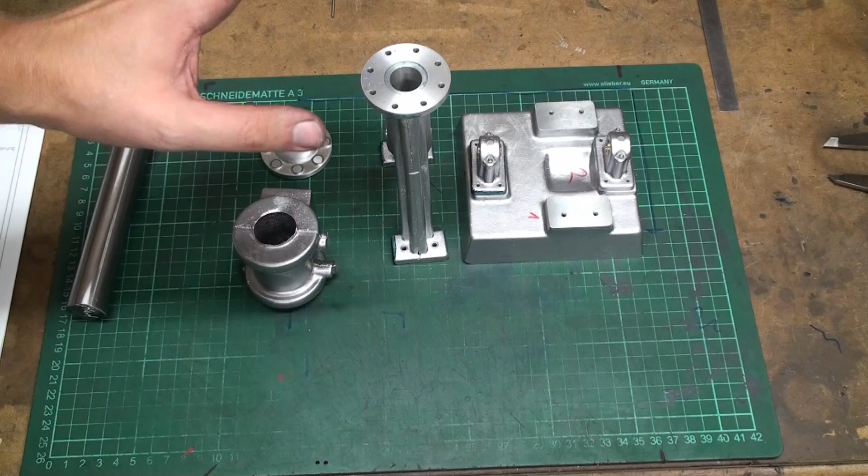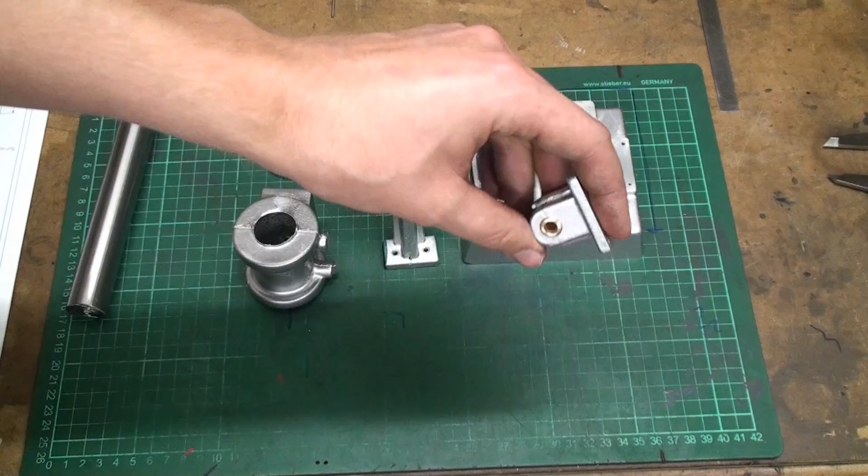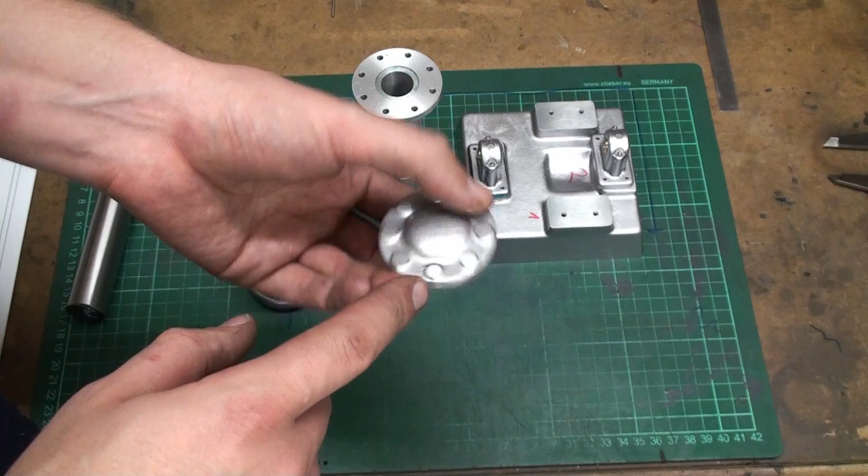This is part 3 on the small single-cylinder steam engine. In past episodes we machined the base, the A-frame, and the bearing blocks. I made off-camera the brass bushings that go in these bearing blocks because there wasn't much interesting about them. They were just turned from cast bronze rod material and made to fit the bearing blocks. I also started to machine the cylinder head, which was also just turning. So far it's only turning. I still need to drill the 8-hole pattern for the bolts.

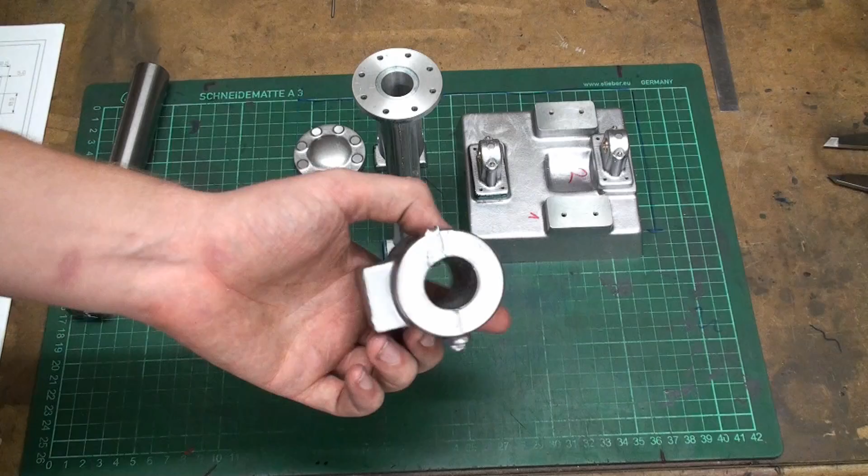In this episode we will start to machine the cylinder, which is a pretty complicated piece. It's the cylinder and the valve box as one piece, and there is really nothing to hold onto so far.

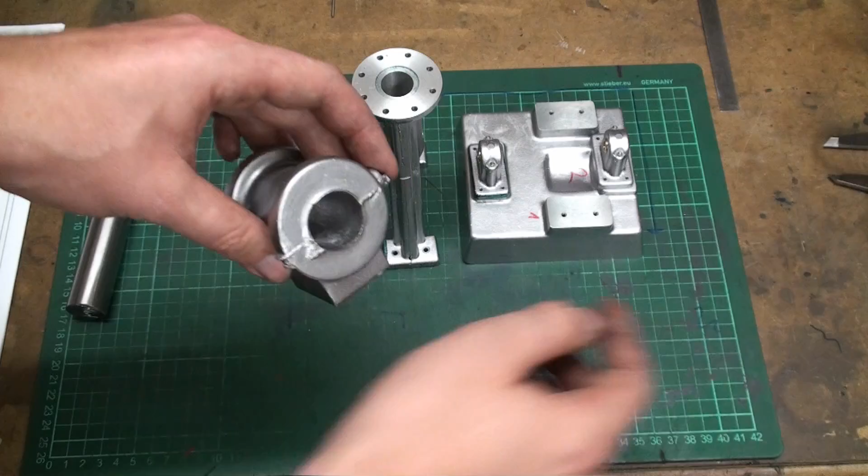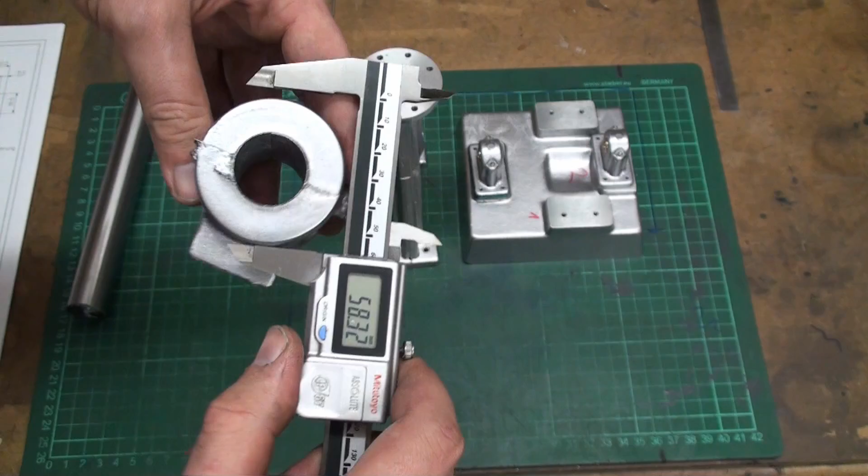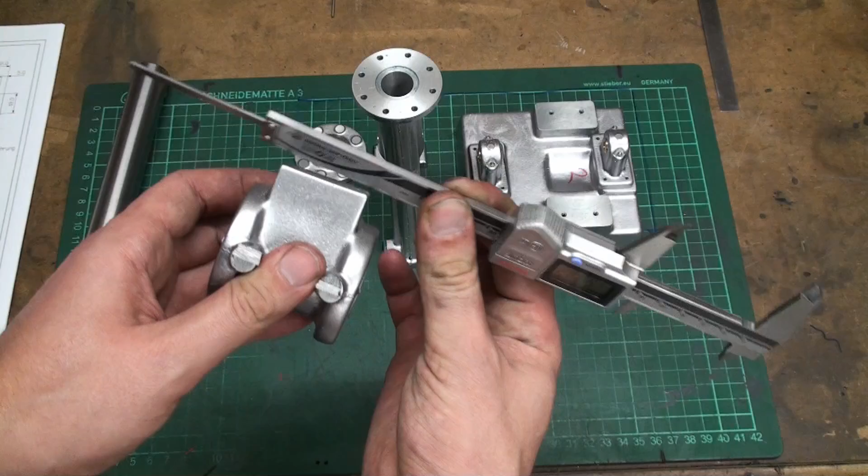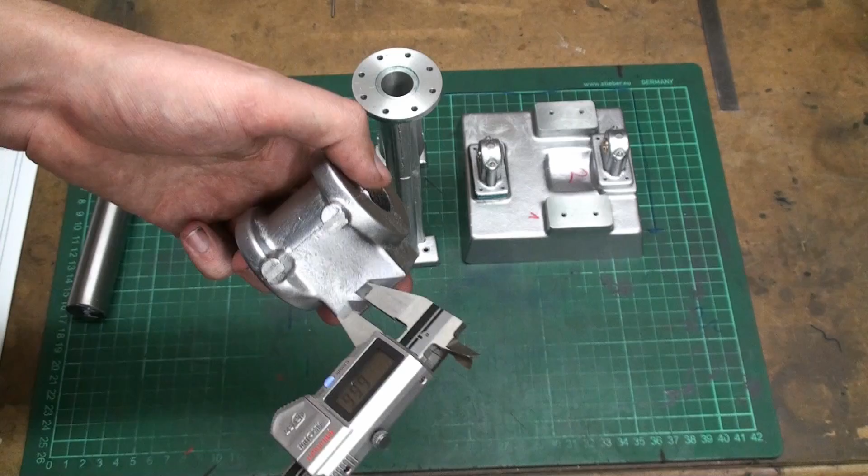The outer diameters here are not super round, and these surfaces are not super parallel either. I was not sure how to hold this. Also this down here is of course not flat because of shrinkage in the casting process, and these sides have signs of shrinkage too, so you can't hold it that way.

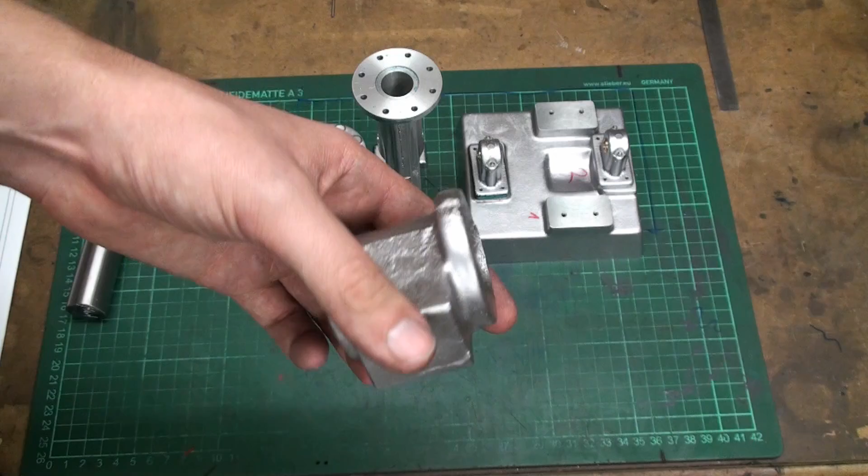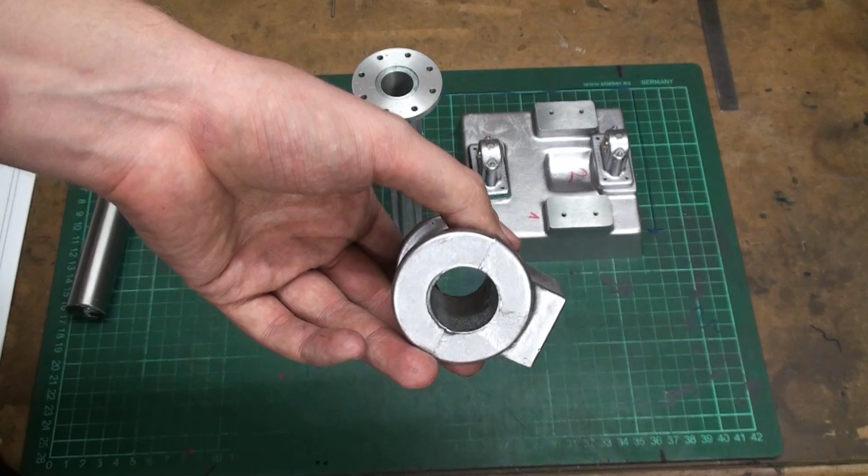I was really not sure if I should start on the lathe or on the milling machine, but I decided to go for the milling machine. We will machine one reference surface, and then we will proceed over to the lathe and line bore the cylinder. Yeah, this is going to be fun.

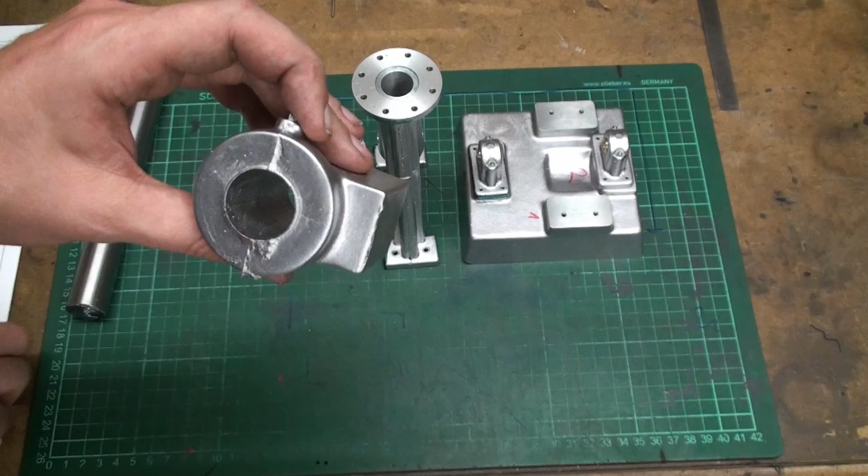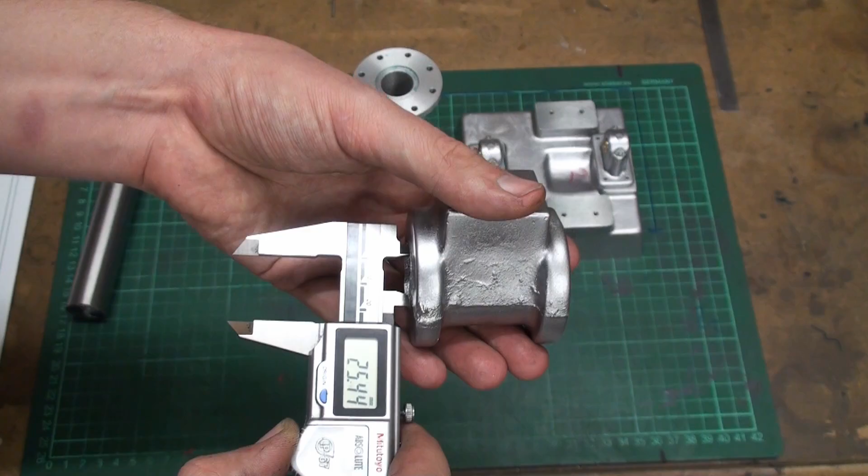What we're going to use as a reference on this part is the bore. The bore is cast with a core. In the first episode you saw me picking out the sand core with a screwdriver. The bore is actually pretty precise, supposed to be about 25 millimeters, and as you can see, it's not super round, but it's close enough. The bore is where everything references off later.

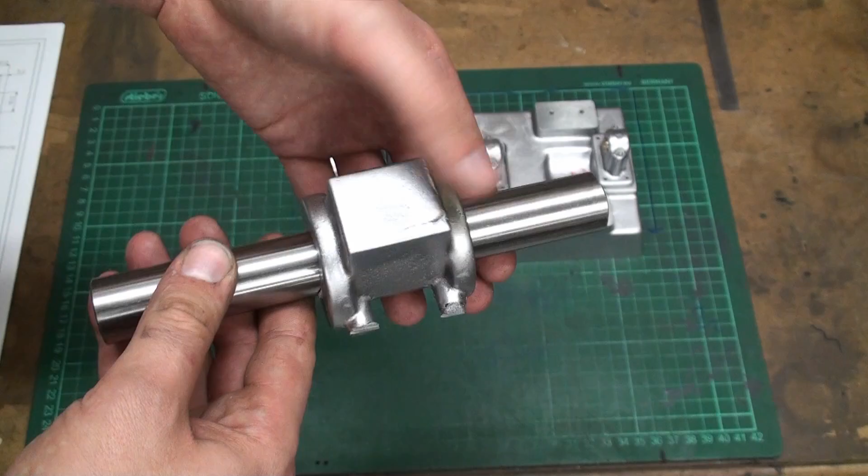I had a piece of 25 millimeter shafting material, hardened and ground, and this fits pretty precisely into the cylinder with not much wiggle - that's a good starting point for the machining. Now we can rest this precision ground stock on something, hold the cylinder, and machine at least one surface flat. After that we can flip it around on that machined surface and true up the bore and machine the flanges.

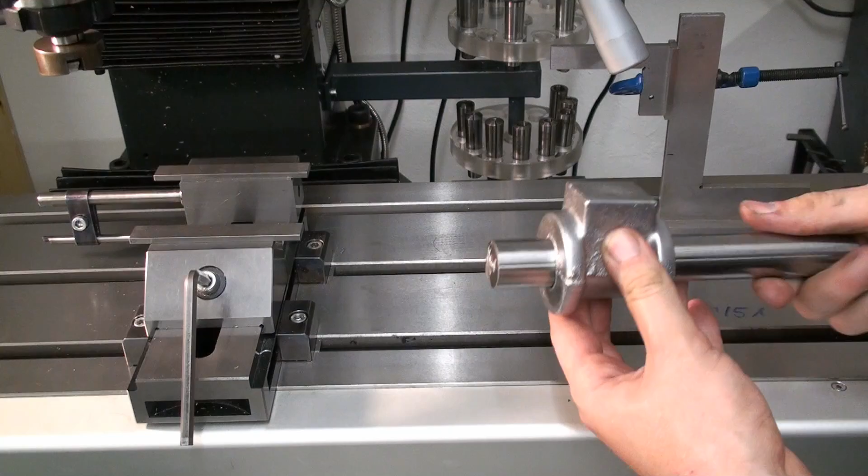So okay, we're over at the milling machine, and I have the cylinder here and my piece of 25 millimeter precision ground rod, and now we can put this into the vise. There are two parallels up here on the vise jaws, and I can simply drop my part between the jaws of the vise and let the steel rod rest on these two parallels.

Now we tighten the vise finger tight, so we can still adjust it slightly. And now my specialized square comes in - these are two machinist squares C-clamped together, carefully of course, but also these are no precision squares. With the second square over the workpiece, I can kind of align it so it's, yeah, kind of square to the table.

As you can see, the gap between the part and the upper square is pretty much constant, so the surface is not too much off in that direction. It's pretty wonky in that direction though, as you can see when I start here, big gap, and when we pull it to the front, now the square rests on the workpiece. But that doesn't matter for this purpose, as we want to machine this down now.

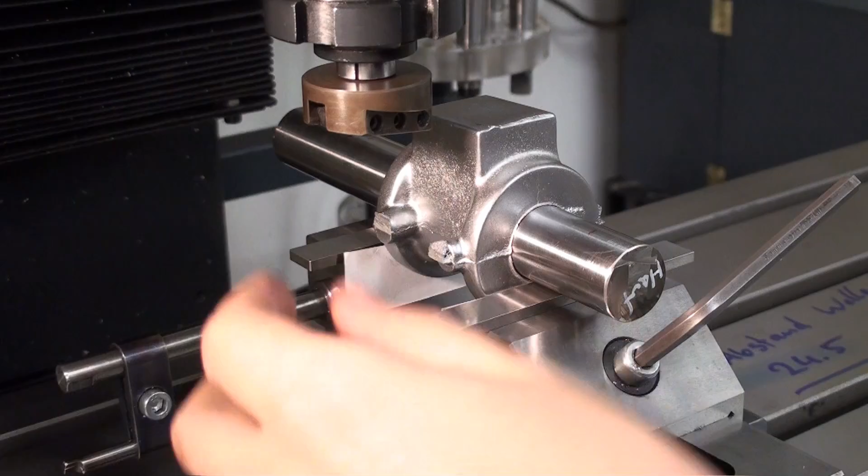Okay, this is again the setup from a different view. I added some cardboard again, as this is a raw casting and there are irregularities as you saw before, and the cardboard really does a good job of increasing the holding power by filling those voids. I have my medium-sized fly cutter up here in the spindle, set to 580, and we're taking a first pass on this surface.

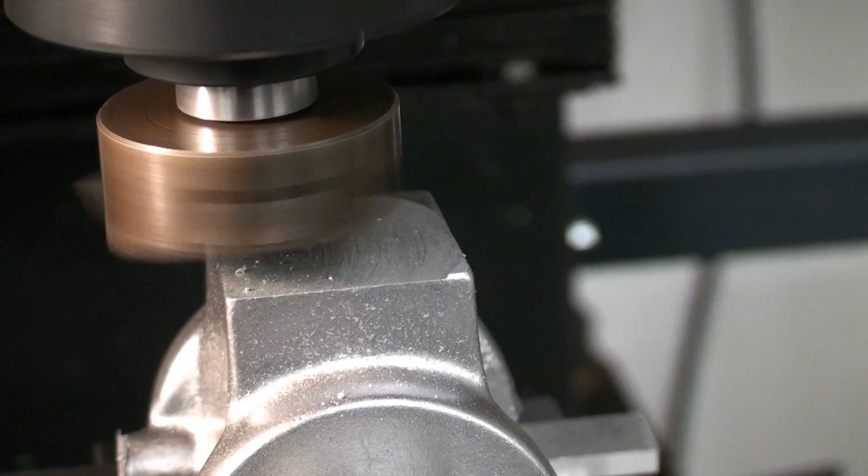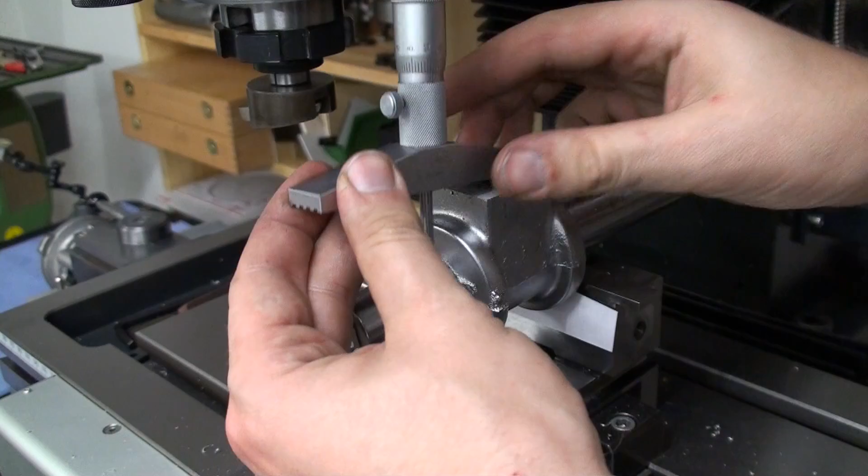So you just saw me run the fly cutter over the surface, but now we need to check the distance of this surface against the rod. I calculated the distance from the surface of the valve box against the edge of the rod, and that distance is 24.5 millimeters, so I can measure this with my depth mics. I just drop it on here.

Okay, I took another finishing pass, and the surface finish this time is very, very good. I used a little bit of cutting oil. And let's take another measurement.

Let's do this so you can see the actual dial, and as you can see, we hit right away the high spot, and we hit our 24.5 millimeters, pretty good, about hundredths of a millimeter off. And this measurement is not super critical, as we can still correct the location of the bore when we do the actual boring. Right now we're referencing off the cast bore.

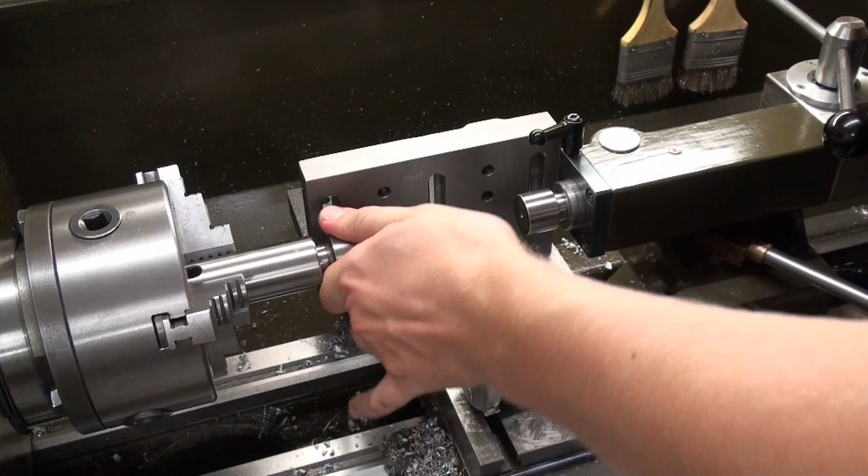I have a Morse taper 2 ball nose that's centered in the spindle, and I have a 26mm plug in the tailstock, which I had accidentally laying around. I think that came with my rotary table to align the 3-jaw chuck, but I never use it.

Now I can just crank the table out of the way, crank the angle plate a bit back, and rest the part in pieces. Now rest it between centers and bring in...

...the angle plate by cranking the cross feed in. And now the part is semi-aligned. It's aligned in that direction for tilt and for rotation and all that. And now we can bolt it down, and then we have to use the edge finder, touch off on the surface of the angle plate, which is also the top surface of the valve box, which is our reference surface right now.

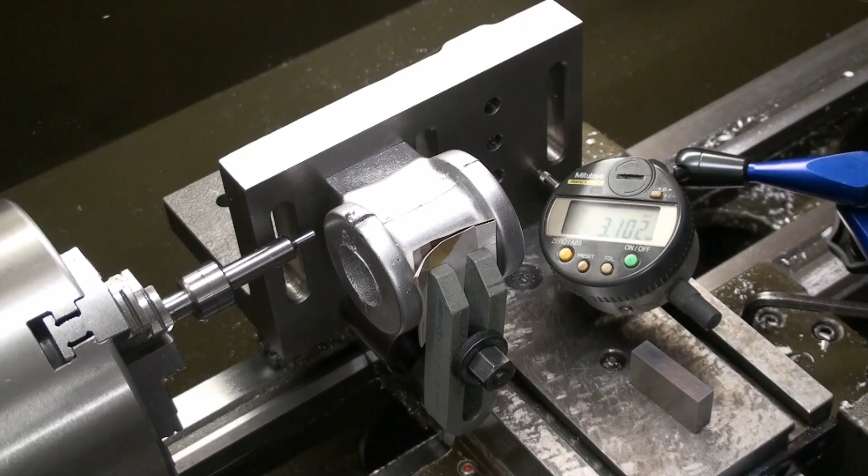Let's see if I can. Okay, this is a little bit better. Now you can kind of see what's happening on the display. And I will adjust the dial indicator slightly.

And now we will use the edge finder to touch off on the angle plate, which is the surface of the valve box. And there it kicked. Now we can zero our DRO. There we go, 0, and repeat it. And there we go.

You just saw me covering up the display by hand, so you believe me that I did the touch off by looking at the edge finder, not on the actual dial. And as you can see, it shows 0.001, and that's the repeatability of these edge finders. Those are incredibly accurate if you pay attention. Then they are just accurate, not some approximation.

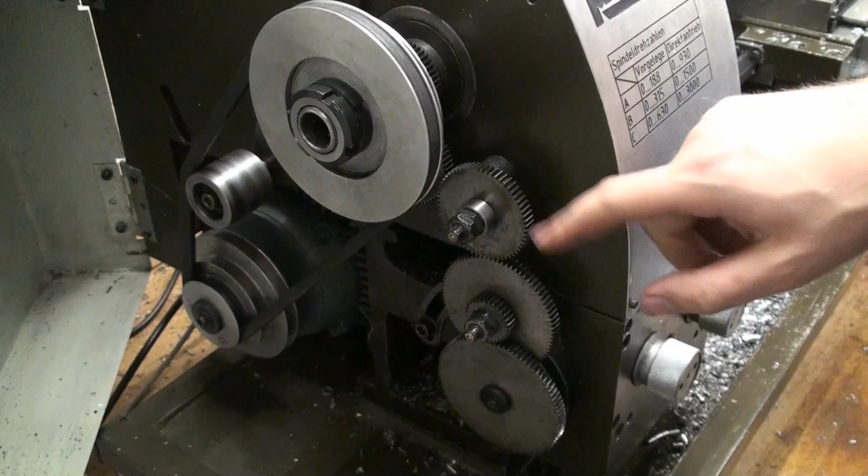Back here you can see the drivetrain that I think most of the 9x20 lathes have. You have this banjo which can be swiveled in and out by loosening this screw, and then you can engage and disengage this upper gear to the main spindle. This works pretty good, it's a bit rough, but it works.

What's a real pain is to adjust the distance between those axles when you change the actual gears. The gear changing itself also is not too bad, but adjusting for those pins is just awful. But I have an idea how to fix this and make it very usable.

But for now we just want to engage the feed. And of course you want the whole gear train to have a bit of play, so it doesn't bind up on you.

Okay, let's go, give it some RPM and let it feed in. Before that I will add some cutting oil to the bore, just to make it a bit easier cutting. What works well on aluminum is, of course, the good old stuff. I'm using it because it's in a nice spray bottle and I can just squeeze some in there. Reaching in with the acid brush is a bit hard.

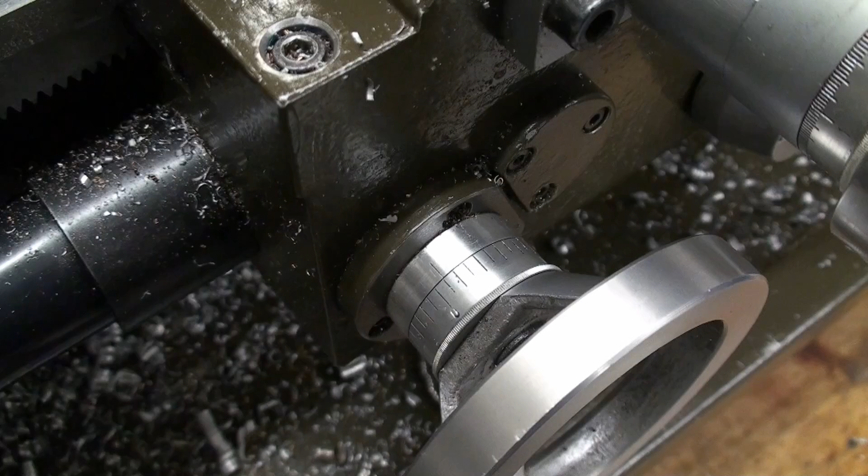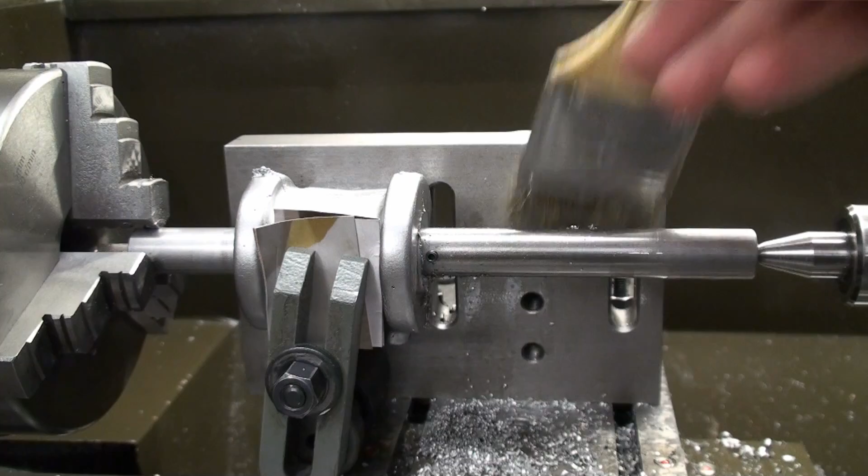Okay, engage the feed. There we go. Disengage the feed and turn off the spindle, and we did a nice cut there. Runs smoothly, no sound that makes you worry about something, just plain old cutting noise.

In that case we can easily measure the bore with the 2-point internal mic, as we can reach in the bore from both sides, and we can check if it's parallel over the whole length by measuring it on both sides.

But as with all measuring devices, it's just getting a feel for the tool. The 2-point internal mics are very prone to get stuck. We are at 27.49, and on the other side we have 27.49, and that was to expect, as I know that this lathe turns very parallel.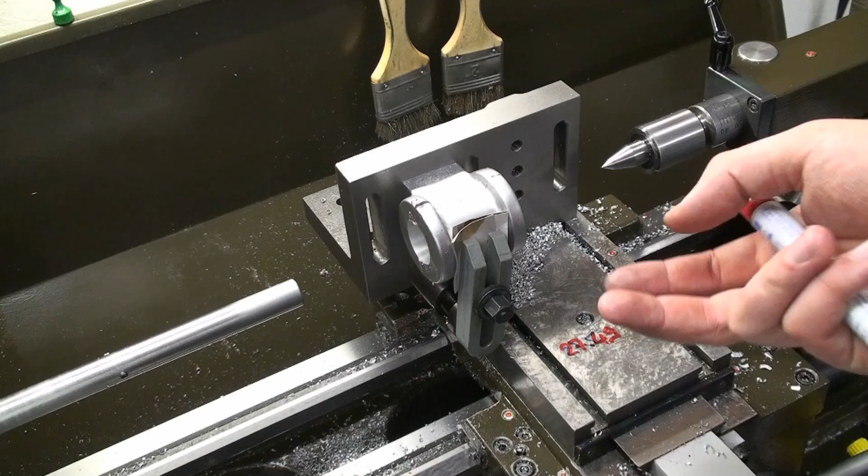So now we can adjust the cutter. We have to open up the bore to 30 millimeters, and right now we are at 27.49. As I mentioned somewhere else, I always like to write down my numbers. Nothing is worse than trying to remember a number and then adjusting your cut and overshooting because you recall the number the wrong way from your brain. When you write it down, you have something to reference off.

Okay, I did some cuts off camera, and now we're at 29.5, and we need to increase the size of the hole by another 0.5 millimeters, and I will show you how I adjust the cutter in this boring bar.

Just to explain, the boring bar is a piece of cold rolled steel. It's cross drilled to take a small carbide turning tool with a 3 millimeter diameter. It's a reground shank of a carbide end mill, with a set screw at 90 degrees to clamp it in position, and behind the cutting tool is another set screw to advance the cutter. When I turn the screw, the tool will be pushed out, and that's what we use to fine adjust the diameter. I have my digital indicator here with a big flat tip.

We will rest the cutter against this tip and look for the high spot. That's here, about pretty much here, and we zero the dial indicator and don't touch it anymore.

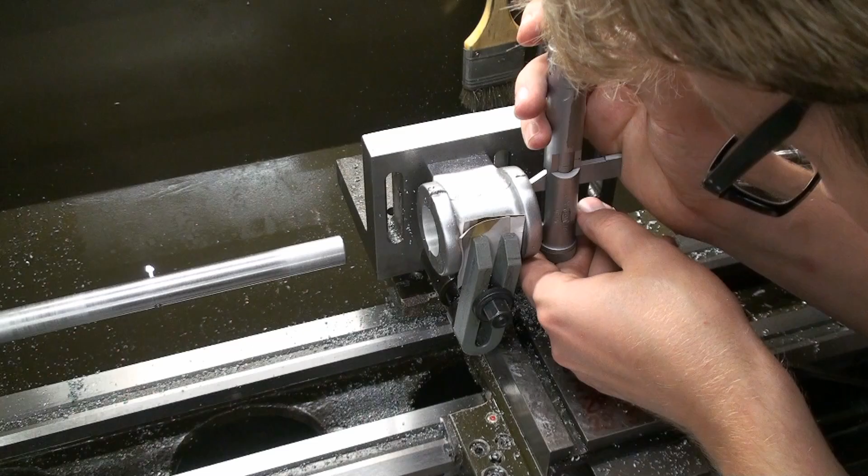Make sure everything's clean. And there we have it, 30.00.

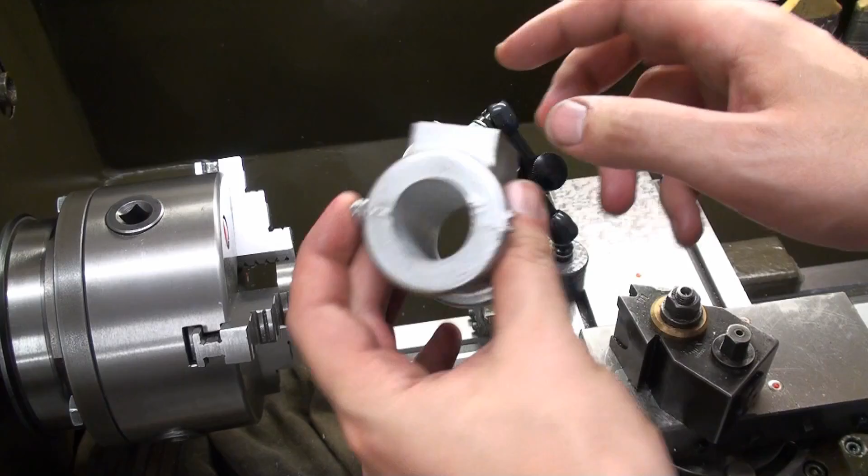I will tear down the setup, bring the lathe back in normal operation by putting the top slide back on, and we will proceed with the cylinder. So now we have our cylinder bored out to the desired diameter, and we want to machine the flanges on the ends. We could chuck it on the inside with the jaws like this and turn the other side and so on, but I don't want to chuck on the freshly bored surface.

Instead, I found a piece of 30mm drill rod in my scrap box, and I chucked it up in this three-jaw and checked it for runout, and it's running about 0.02 of a millimeter, and that's perfectly fine.

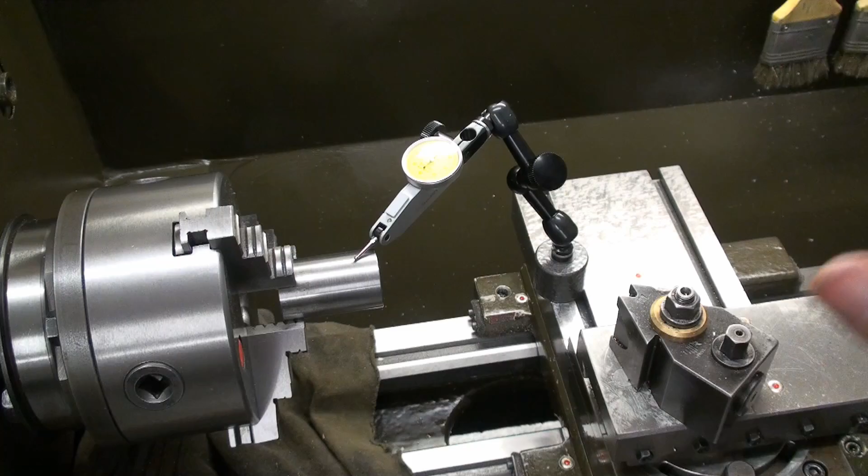Notice that I have a new dial test indicator without a broken glass. The Mahr dial indicators were on sale with the tool supplier I have, and I just ordered a new one. The nice thing with a new measuring tool is they come even with a proper test report, not like some other tools.

What we can do now is push the cylinder over this piece of drill rod, and this is very precisely aligned. Of course, we can't machine it as there is no direct connection between the drill rod and the cylinder.

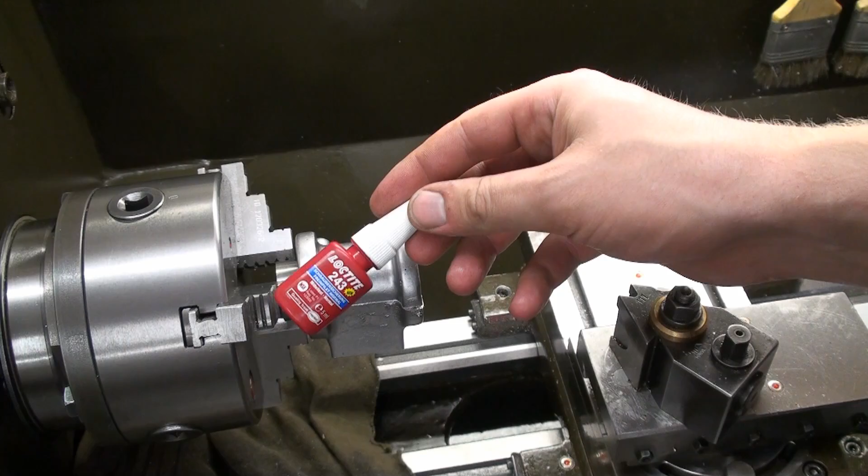But we can use something called a chemical press fit, or otherwise known as Loctite. I'm not going to use my usual bushing retaining Loctite, as it's horrible to get off again. For this purpose I'm using a medium strength screw retainer, and that will hold the cylinder good enough on this piece of drill rod to machine the casting out here.

We will just put some of it on here, get some under the cylinder and some in front here too, just to give it a good bond, and we push it over the drill rod.

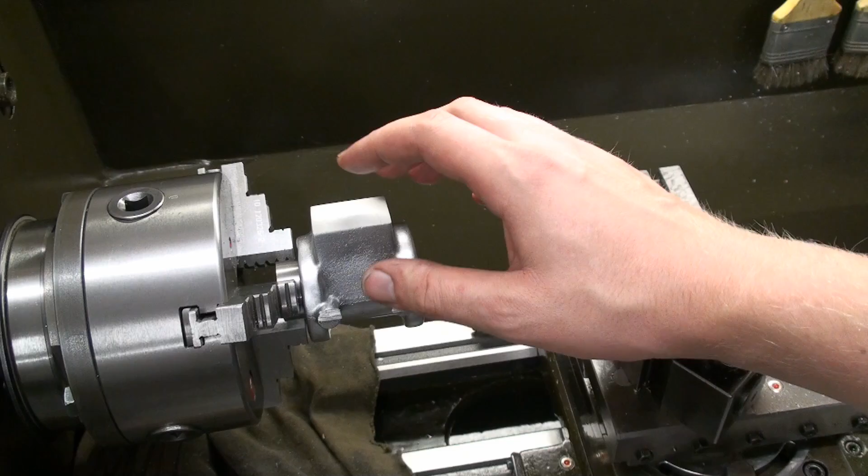Make sure it's sitting in a good position, and now we wait until the Loctite is set. This will take about, in a few minutes, enough to handle it. In fact, it's already bonding up pretty good.

I will not do any machining to this part today. I will wait until tomorrow until the Loctite has fully set, and I can do the machining on this side.

We heat it up slightly so the Loctite releases, then we will press out the slug, the drill rod in there. Let's see. Yeah, now it's finger tight. Then we press out the slug, turn it around, then we can clamp it on a faceplate, for example, when we have one face machined, and machine the other flange. But so far this is going to work. That's for sure.